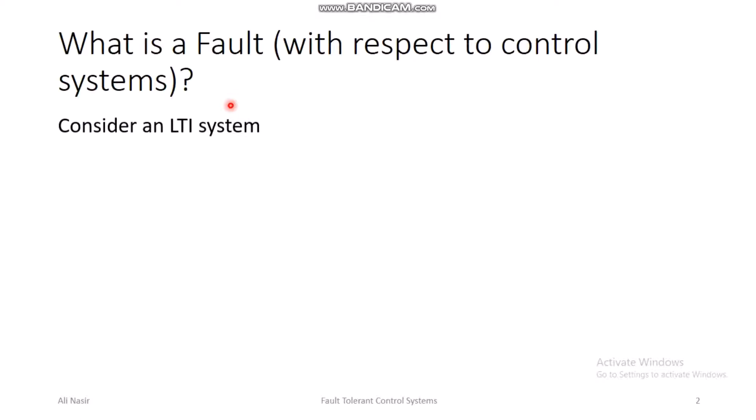So first of all, I begin with the question: what is a fault? What is a fault with respect to control systems? Being control systems engineers or designers, we look at different systems in the form of state space, transfer functions, or differential equations. So if you are given an LTI system and you want to know, with respect to this model of the system, what is the meaning of the fault, then there are three possible fault types that you can study.

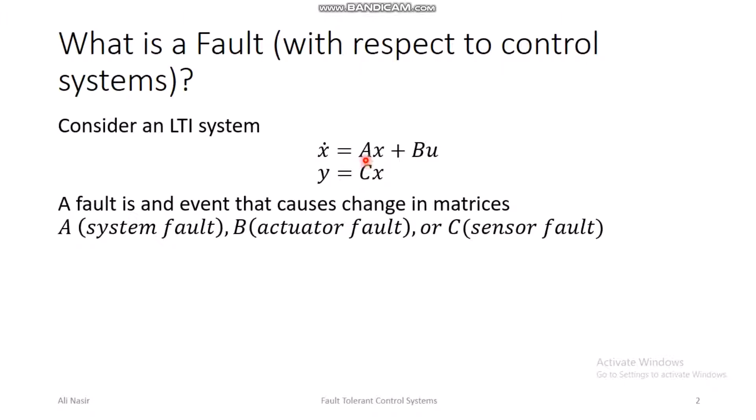If there is any fault in the system itself, any fault that changes the dynamics of the system, then that fault will actually change the A matrix of the system. If a fault occurs in the actuator, then the B matrix will be affected. If a fault occurs in the sensor, the function of the sensor is no longer available, or if the function is distorted due to an event, then the C matrix will be affected. So basically a fault is an event that could change either one or more of the A, B or C matrices in the LTI system.

Similarly, if you look at nonlinear systems, x dot equals f of x plus g of x times u, and y equals h of x, where f of x, g of x, and h of x are nonlinear functions of the state vector x, then a fault is an event that causes changes in these nonlinear functions. A system fault will change f of x, an actuator fault will change g of x, and a sensor fault will change h of x. So this is what a fault really means in terms of control systems.

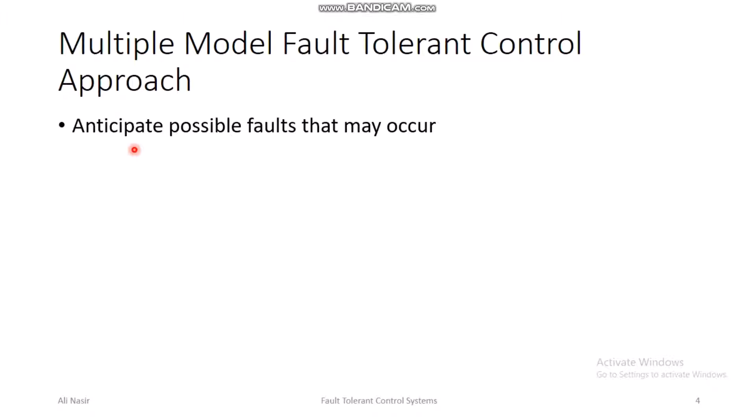This is the approach where you anticipate possible faults that may occur in the system and then develop mathematical models for each corresponding fault situation. So in this case you have multiple models, as the name suggests. Each model corresponds to a different fault situation. For example, you have different A matrix, B matrix, and C matrix for different fault situations.

Design a control law that corresponds to each fault situation. So all of this we are doing beforehand, before actually implementing or deploying the system. We are doing all of this calculations, modeling, and controller design, and then once we do that...

we develop a threshold based fault detection and diagnosis scheme. Well, the fault detection and diagnosis scheme is usually threshold based, but there are many fault detection and diagnosis schemes available in the literature. You can also look at schemes that have fixed threshold, adaptive threshold, or some sort of dynamic thresholds.

Devise a switching law based on thresholds of fault diagnosis, and sometimes there might be different thresholds for the diagnosis or detection of a fault, and there might be some other thresholds for the decision of reconfiguration. So sometimes a fault might be detected, but the reconfiguration decision may not be executed right away.

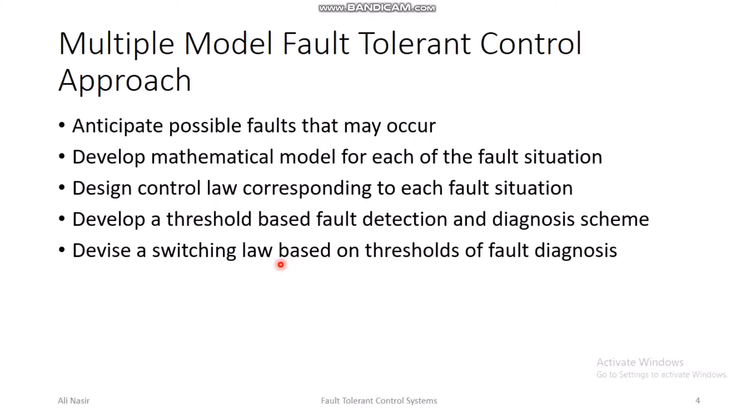I'm just discussing this for the sake of completion of the discussion. Improve the threshold values based on machine learning or adaptation rules. So this is also one of the perspectives, and there are many other perspectives.

So this is multiple model fault tolerant control. You anticipate possible faults that might occur, then develop mathematical models for each fault situation, and then design the control law corresponding to each fault situation. Then the fault diagnosis method, then the switching laws or supervisory control, and then there might be machine learning or adaptation of the thresholds.

Alright, so next we shall be looking at an example of multiple model fault tolerant control, and this example is concerning the fault tolerant control for a spacecraft.

Spacecraft need fault tolerant control more than anything else for multiple reasons. First of all, because the space environment is very hostile, and there are charged particles in space, and there are a lot of temperature difficulties and other unexpected variations due to which spacecraft could be experiencing more faults. The occurrences of faults are more frequent in spacecraft compared to systems that operate within the atmosphere of the Earth.

Also, the other reason why fault tolerant control is more important for spacecraft is that spacecraft are not accessible for humans to repair, and they do need self repair capability or fault tolerance capability in order to have a longer life duration, because space missions do involve a lot of financial resources. So in order to save those resources, or make the investment durable, it is highly desirable to incorporate fault tolerant control in spacecraft.

So for the spacecraft model, there are multiple ways to model a spacecraft. A common model is to use the Quaternion vector. The Quaternion vector is a vector of 4 variables which are called Quaternion variables, and the angular velocity of the spacecraft is in 3 dimensions. You can have a body fixed frame of reference, and with respect to the body fixed frame of reference...

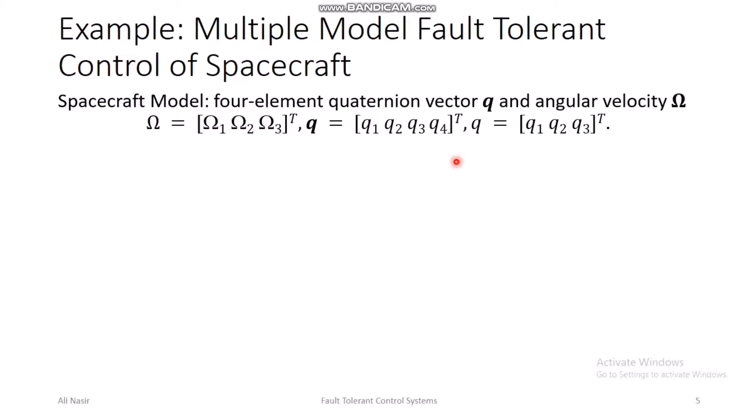Alright, so with respect to the Quaternion, the equations that represent the kinematics of the spacecraft are as follows: Q dot, which is a vector with 3 variables, is equal to 1/2 times q4 omega minus omega cross q. So this is the cross product between the 2 vectors, omega and q, and q4 is a scalar, and omega is still a vector, and q is also a vector of 3 variables.

So this is 3 of the Quaternions, the dynamics of 3 of the Quaternion variables. You can find out more about Quaternions and what they represent in terms of the orientation of the spacecraft. Basically Quaternions are used to represent the orientation of the spacecraft.

Sometimes people use Euler angles, roll, pitch and yaw angles, especially in aircraft. Sometimes people use rotation matrices to represent the orientation of different rigid bodies, and Quaternions are also a very effective way of representing the orientation of the spacecraft.

So rate of change of orientation, the dynamics related to the orientation of the spacecraft, those are the kinematics of the spacecraft. q4 dot is 1/2 times the dot product between omega and the quaternion vector. This is omega transpose q, which gives a scalar quantity, the derivative of the 4th quaternion variable.

Okay, let us consider the following faults for our spacecraft. First, fault number 1 is partial failure in the actuator corresponding to U1.

Let me briefly tell you what kind of actuators are used in the spacecraft. Usually there are two main types. One is the thruster pair. The thrusters could be ion thrusters or jet propulsion thrusters, and they are used in pairs, mounted across 3 axes. In order to control the orientation of the spacecraft in 3 axes, you need at least 6 thrusters, or 3 thruster pairs.

Another way to control the orientation of the spacecraft is to use momentum wheels or reaction wheels. These operate on the law of conservation of momentum. Once you change the rotational velocity of the momentum wheel, in order to conserve the momentum of the overall system, the spacecraft tends to rotate in the opposite direction, that is, opposite to the rate of change of angular velocity of the reaction wheel or momentum wheel.

Fault 2 is the partial failure of the actuator corresponding to U2, and fault 3 could be partial failure of the actuator corresponding to U3. So these three faults are faults that might occur in the thrusters of the spacecraft, or maybe in the reaction wheels or momentum wheels of the spacecraft. Then fault 4 could be the failure of the sensor measuring omega 1.

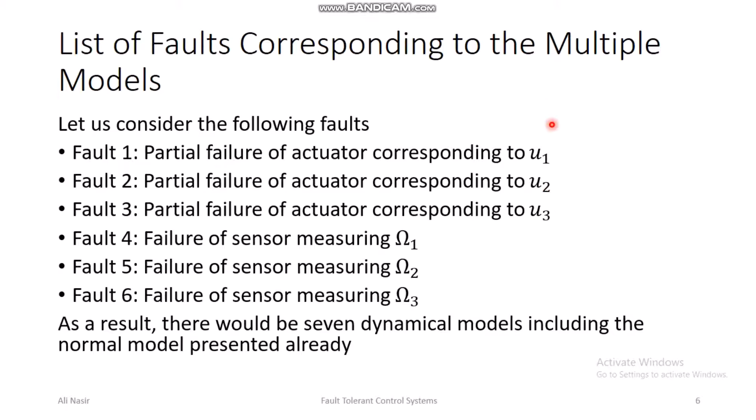You might have noticed that we are considering one fault at a time. If you were to consider simultaneous faults, then the number of models will increase as the Cartesian product, the magnitude of the Cartesian product of the different elements of the faults. That will become a big set of faults if you were to consider any of these faults occurring simultaneously.

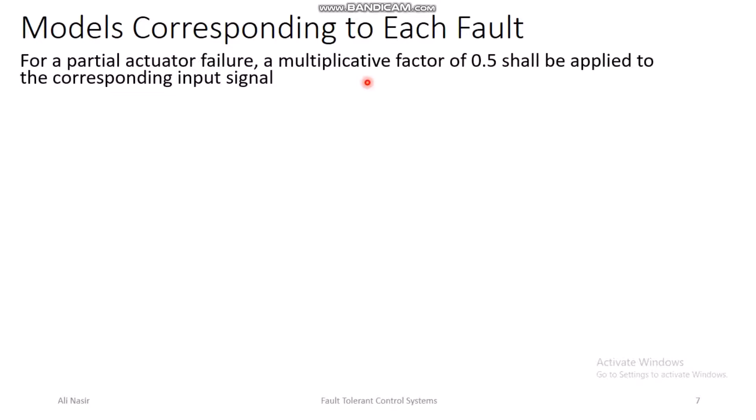Okay, models corresponding to each fault. For partial actuator failure, for example, we can have a multiplication factor of 0.5 applied to the control signal input, and for sensor failure the output of the sensor shall be 0 for all time. So we have to model how the actuator fails. We can also represent the actuator failure as a total failure, or as a partial failure. 0.5 failure means the actuator loses 50% of its power or thrust capability, and 0 here means the sensor is fully

dysfunctional after the fault. So when the sensor is dysfunctional, based on the observability property of the system, in this case the 3 faults we have considered, even after the occurrence of these faults the system does remain observable, of course, because this example is pre-calculated and prepared for this lecture.

That is why I have considered only the faults that do not affect controllability and observability. In practice, when a fault occurs, you have to do post-fault controllability and observability analysis. If you lose controllability after a fault, you might have to switch to redundant equipment in the system, or if there is no redundant equipment, then post-fault control capabilities may not be as much as the control capability before the occurrence of the fault.

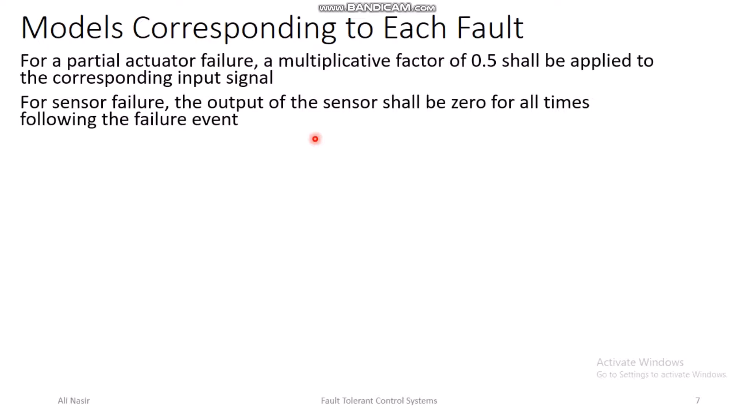So this will be the change in the model that represents the actuator failure, and similarly the change in the model representing sensor failure would be that instead of using omega as feedback in the feedback control law, we might use the estimate of omega coming from the state estimator, such as an extended Kalman filter or other nonlinear observer. If the sensor fails, the observer comes into play, and the feedback control law will no longer be based on full state feedback. It will become a dynamic compensator.

Similarly, when this fault occurs, the post-fault gains of the controller may not be the same as pre-fault gains. You might change the gains after the occurrence of faults, or if the fault is too small, maybe after the fault this becomes 0.98 U3, only 2% of actuation capability is lost, then maybe you will not be willing to change the gains of the control. So it all depends on the magnitude of the fault in practical situations.

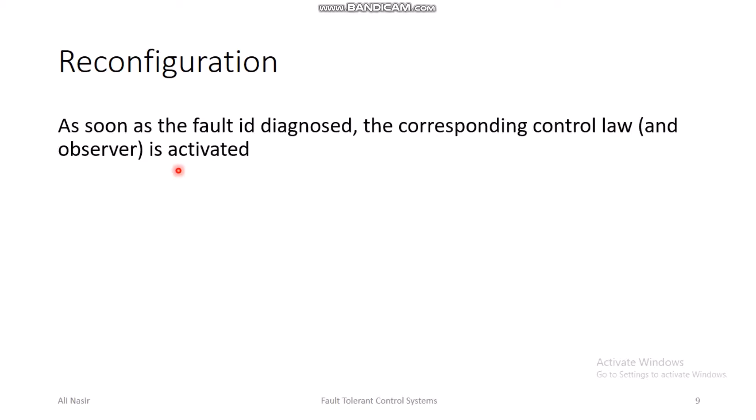Okay, then there is reconfiguration. As soon as the fault identity is diagnosed, meaning you have diagnosed which model is actually active currently in the system, then the corresponding control law can be activated. For that you can use a multiplexer or any type of switching which selects between any of these models to be the currently active model, and on that basis you can reconfigure the control. So control will be there—there is a control law corresponding to each of these models, and which control law is active at what situation will depend upon the switching criteria.

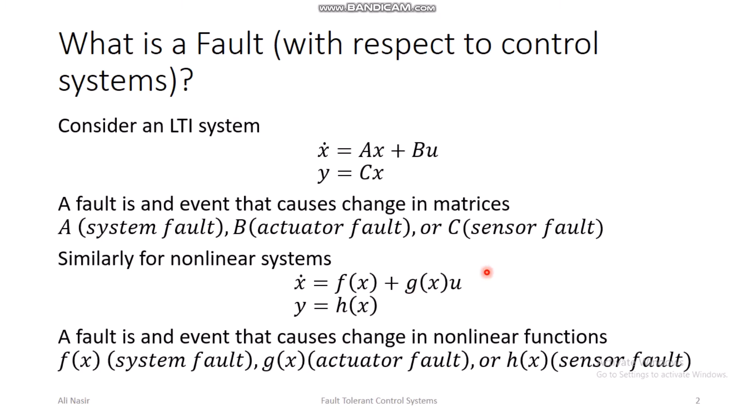It is a change in the A, B, or C matrices, or the f of x, g of x, h of x functions in nonlinear systems. Then we looked at the block diagram of fault tolerant control, where we see some additional features compared to the block diagram of usual or classical control systems.

We have a new block of fault detection and diagnosis, and a new block of supervisory or switching control, and the old blocks of feedback and feedforward control are changed as well into reconfigurable feedback and reconfigurable feedforward control.

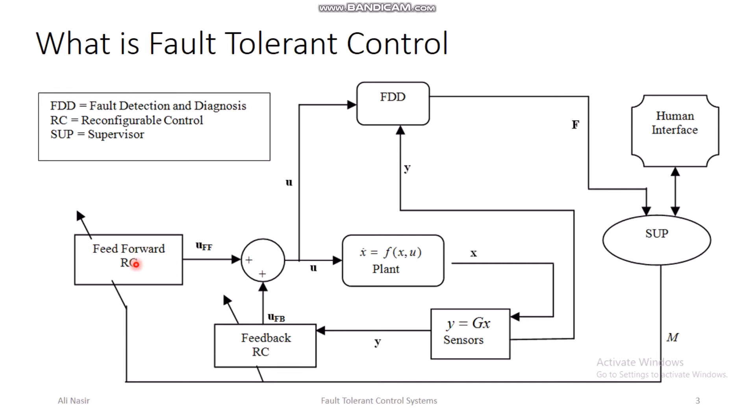Then we looked at the multiple model fault tolerant control approach, based on steps involving anticipation of possible faults, development of mathematical models corresponding to faults, design of control laws corresponding to different faults, development of threshold-based fault detection and diagnosis schemes, development of a switching scheme, and there might also be involvement of improvement of thresholds, which we have not discussed in this lecture, but it's worth mentioning here.

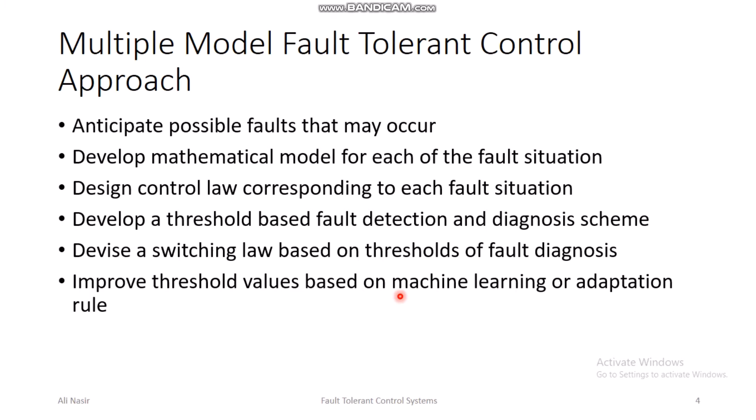Then we looked at the example of fault tolerant control for a spacecraft which has 7 state variables and a control law that is nonlinear, but mostly linear except for this nonlinear term.

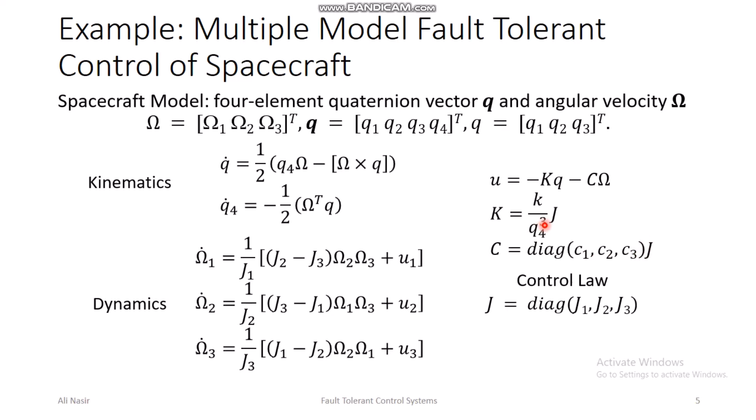Then we looked at 6 different fault scenarios, 3 actuator faults and 3 sensor faults, and we looked at how the dynamical model of the spacecraft would change in response to the different faults considered in this lecture.

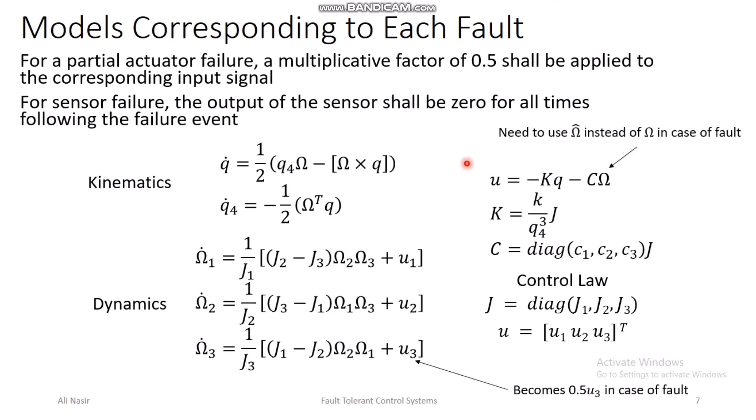So here there will be a change in the multiplication factor with the control input variable, and here we shall be using the estimates of the states instead of state feedback when the sensor failure occurs.

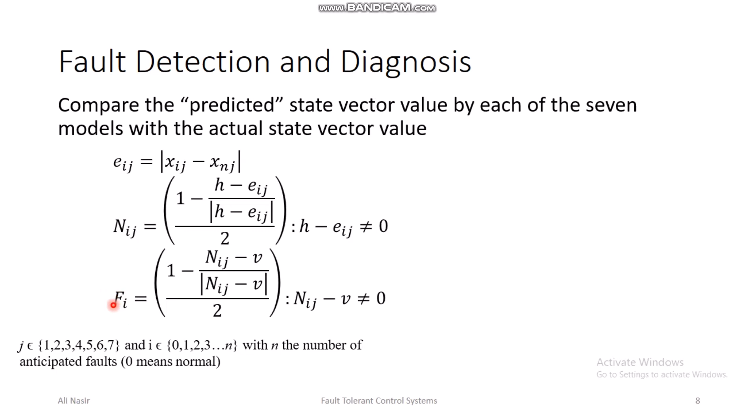For fault detection and diagnosis, we discussed a 3-level scheme involving residual generation, fault detection number generation, and fault hypothesis generation. In the end, from the fault hypothesis we decide whether a certain fault has occurred or not.

Then we discussed reconfiguration, which is very simple. You just have to select one of the models based on the information from the fault detection and diagnosis.